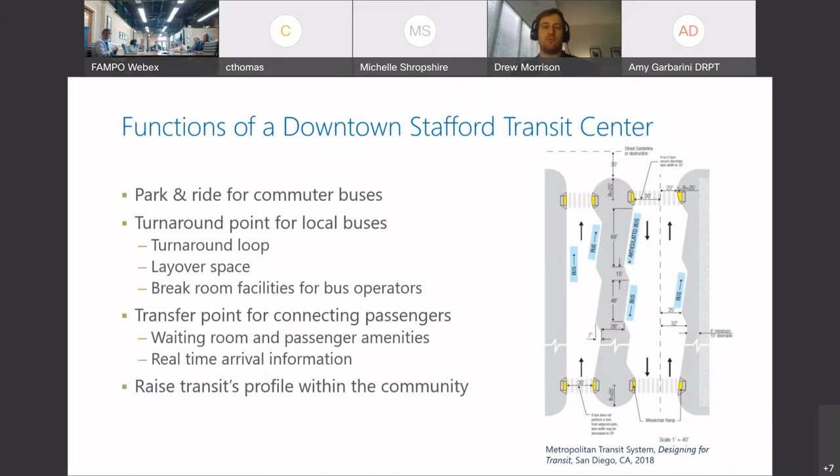And that other drawing I have here is actually from my favorite transit design handbook. It's in San Diego—no, I had nothing to do with it, I just really like it. But it's from San Diego MTS. This is what they show as our template in order to create a transit center. This is the footprint for it.

So in Memo 4A, staff looked at 4 locations. We understand there could be some other locations, and we're working towards that—we'll include those as well. But we started with these 4 points. We've got one, which is the existing park and ride location—it's a nice looking facility, brand new. We have one over here at Courthouse where it makes the new turn. Then another one, number 3, right behind it in green. And then we have one over by basically the municipal complex, which we show as number 4.

We drew a quarter-mile radius around each of these, that convenient walk, and you can see that none of these cover all of the downtown Stafford development, which is all this colored stuff. Let alone—you can't see it because of our picture here, but the hospital's over here, so you can't quite make the hospital either. It's going to be a bit of a walk to do that. So there is no magic bullet in any of this to say that's the one, everyone can get everywhere they need to go, perfect location. We didn't come up with one of those.

So then we thought, okay, me being an operations planner, I think, well, what does the bus have to do? So let's talk about what we're going to make these buses do. The first thing I talked about functionality is a commuter bus—what is it going to do? It doesn't take a rocket scientist to figure it out. It wants to get onto 95 as quickly as possible to get up to the Pentagon in DC. It doesn't want to meander through a whole bunch of streets. And if you've ever seen one of those coach-type buses, you probably wouldn't want it coming around on your street, let alone any local street. You go, keep that thing out of here. It's big, it's noisy, it's way out of scale.

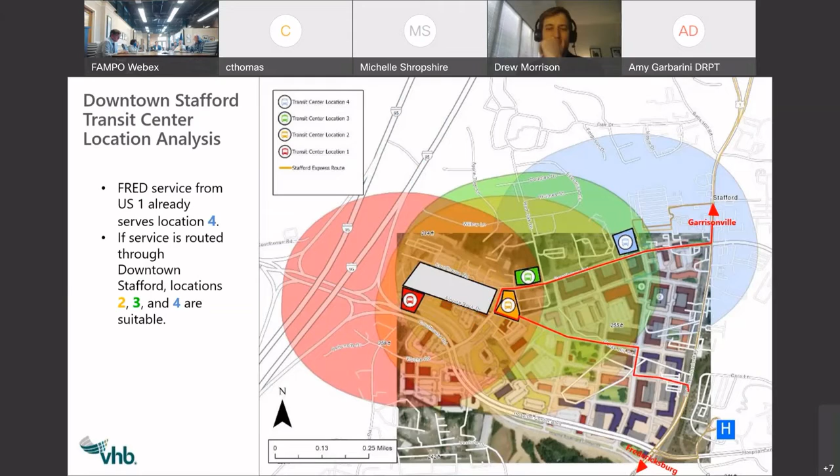So then we thought about the local bus function. What's FRED doing? These gold lines are what Fred's doing today. They come through the courthouse and municipal complex and back over to US 1, but that's all they're doing right now. They go up to Garrisonville and down to Fredericksburg. So we thought, the easy way would be to just do this loop, in which case either locations 2, 3, or 4 would all work fine.

That wouldn't be bad, but there's all this development, and you can see what these buses are doing. They're going through here, coming down here, weaving in to get to the hospital, then going down. Imagine you're on a bus from Garrisonville to Fredericksburg -- by the time you're at this hospital, you're thinking, I am never going to get there, this is taking too long. You're not going to ride it unless you absolutely had to.

So what's more likely needed in the future? We need to rethink this network as a network. You have this massive development coming in as a new downtown, probably with buses radiating through it. That's going to drive how you get to the hospital -- there's a bus from Fredericksburg, there's a bus from wherever this transit center is. So we start thinking about where that transit center should be for these things to connect. Here or here makes sense.

But if you're up here, you're not really going to be able to fan out as well. You're going to have a lot of buses trying to cut through different places to do that.

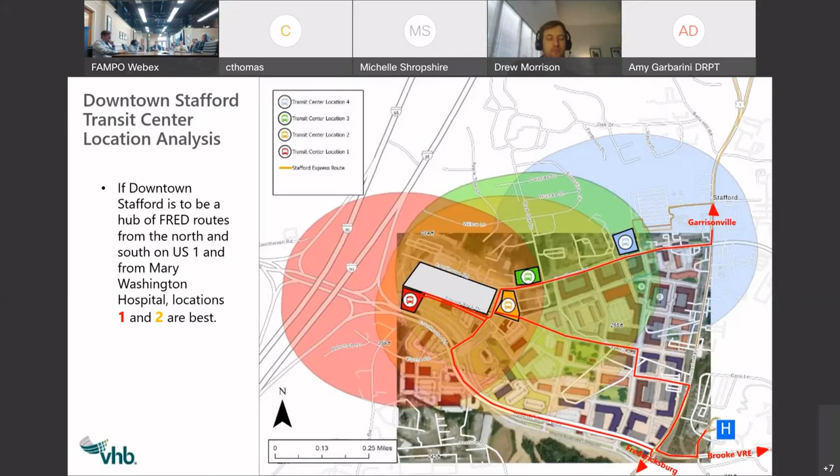The other thing is, you've got to identify a route that's going to go through the development so it can accommodate buses. Remember, buses take wider turns and require wider lanes -- usually at least 11 feet, if not over 12 feet wide. And you need heavier pavement because buses tear streets up. If you've ever been to a parking lot that a transit system has a right to go through, you'll quickly see the pavement gets chewed up fast if there's no agreement to redo it.

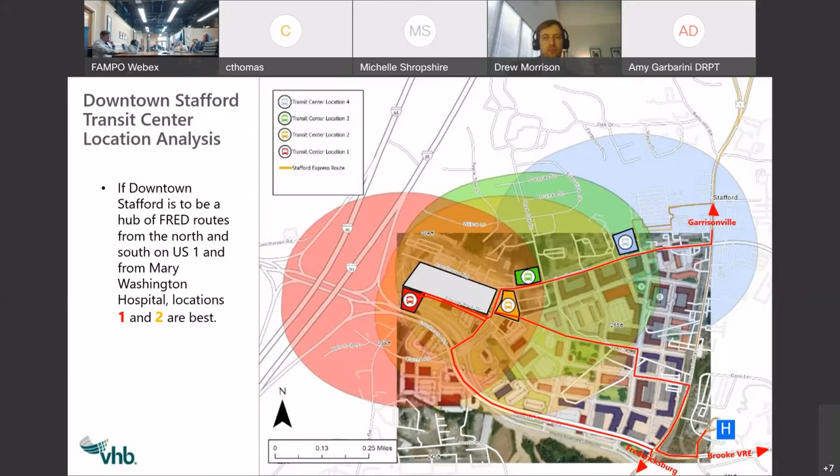So then we thought, what if we put all this together? We've got our little transit network locally fanning out, and our future express buses going north and south on 95. Pulling it together, you're really looking at something in here -- it's kind of a no-brainer when we layer these all together. Something closer to 95 so the express buses can do what they need to do, with the ability for local buses to fan out and serve the area.

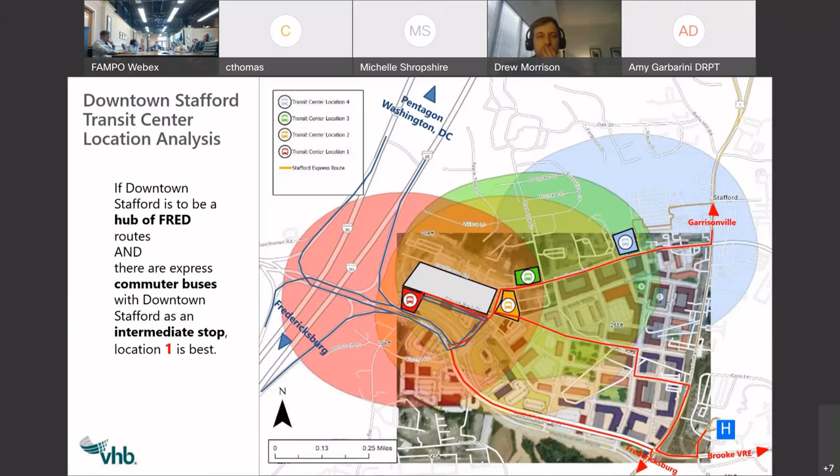So then we looked at what that corner looks like. I don't think the picture does it justice, but we thought, well, this location one is so far back off the courthouse -- can't we just bring it forward? There's a good reason it wasn't built right forward: there's a heck of a grade, so you'd need some sort of vertical circulation for people to get up and down. There's not really room to build this transit center to put things in.

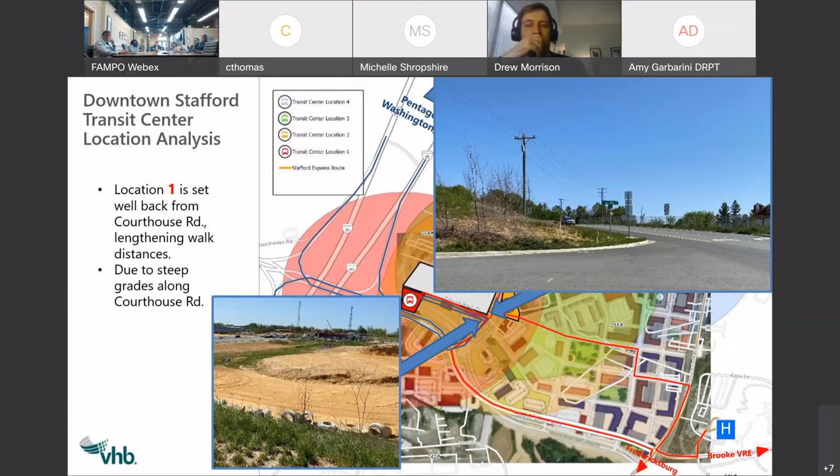But it's not as difficult to fix. This is the nice thing about buses -- you can just put a stop at that intersection and have the transit center behind it. So if I want to get off to go somewhere locally, I can. And if I need to transfer buses, I just stay on the bus, go to the nice facility, and do that.

Now, we also look at it and think, well, there's a lot going on here.

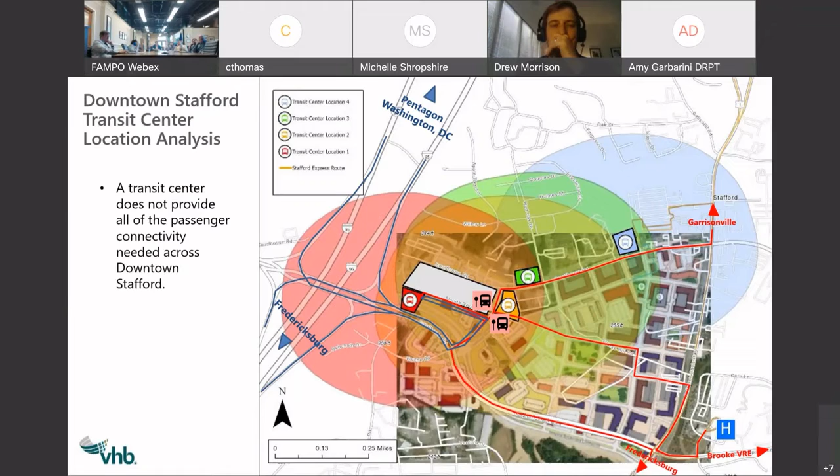And one stop really isn't going to do it, right? So we talked about raising the profile of transit within the community. It's probably not just a transit center over here. It probably also means having some form of station at the hospital, somewhere central downtown, and somewhere up at the courthouse. So it's probably not just this one investment, it's probably 3 or 4 investments to make this really work and be something where people go, yeah, downtown Stafford, there's transit service there. I know I can get a bus there, and I can go do what I need to do.

And again, make sure the streets can accommodate them as well, so thinking through that routing will make a lot of sense. So then we think, what can a transit center be? You might have a certain image of that being around here.

If you've been to Salem Church, I didn't expect it to look like what it does, so probably not what you want to think of as the ideal transit center. There's FRED Central, which is nice in terms of the waiting room and all, but for bus functionality, it was really designed for an intercity terminal, because transit buses, generally by rule, are not allowed to back up. And here, you have to pull in and back up. Costs a lot of time, buses don't have a lot of visibility, you're asking for trouble when you have a design like this.

And then, of course, we have the park and ride lot that's out there now. It's kind of a nice facility, a nice big place. It could serve about 4 buses. When we thought this through in this little connecting network, we're thinking it probably needs to accommodate 5 to 6 buses, allowing a little room for growth.

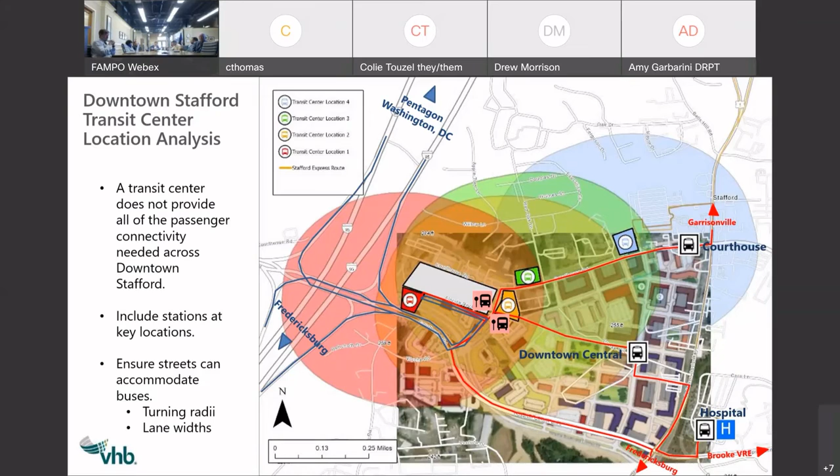So what I guess I'm hearing is that we would like one transit center with a bunch of ancillary bus stops to pick up on the routes that are going to connect at that transit center. Yeah, and again, stations, not stops.

Okay, not like that. You'll probably have lots of these in. We don't want a pole. Yeah, you're gonna have a lot of poles. We want something more substantial than a pole.

Thanks. And that happens a lot, too often. We build everything and then, oh, the transit system just wants to put up one of those metal and glass shelters and they can't find the spot.

There's utilities at every intersection, they can't move the boxes and everything. So on our agenda for today, the next item is to have discussion on these two items. Some of the discussion we've been having during the course of this, so I don't want to belabor it. I don't need to speak for the sake of speaking, but if somebody wants to make additional comments on either the BRT proposals or on the transit center in Stafford, please have at it, and then I'll close that portion and we can move on to the next step.

There were some comments online again, about the Salem Church Road shelter, apparently that's owned by VDOT. Not sure. VDOT's here. We'll be sure to check that out.

And also a suggestion that the consultants ride the route so they can get a better understanding of the needs of the community when it comes to ridership. Yeah, okay, we did drive the route with the consultant. Any further question or comment on these two projects from anybody?